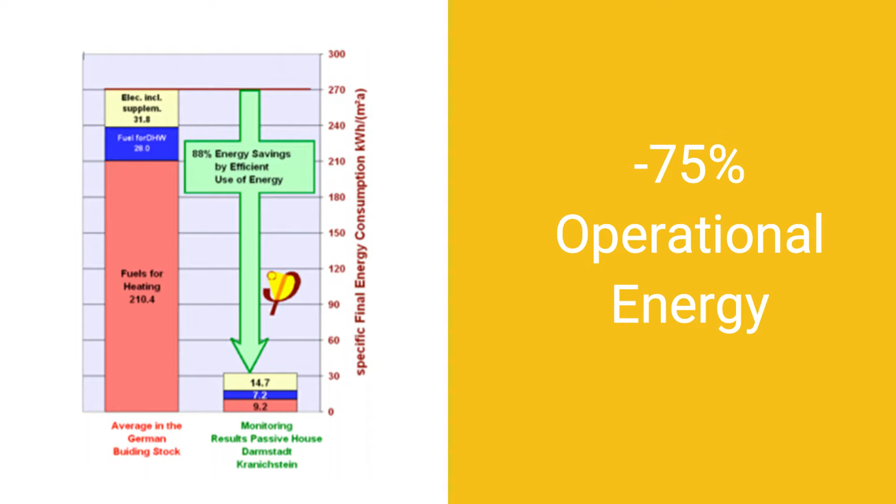The Passive House standard was created in the early 90s based on scientific research that concluded comfort drives performance. In the process of dramatically improving comfort, application of the Passive House principles also resulted in up to 90% reduction in the energy required for heating and cooling, and up to 75% reduction in the total operational energy use of buildings.

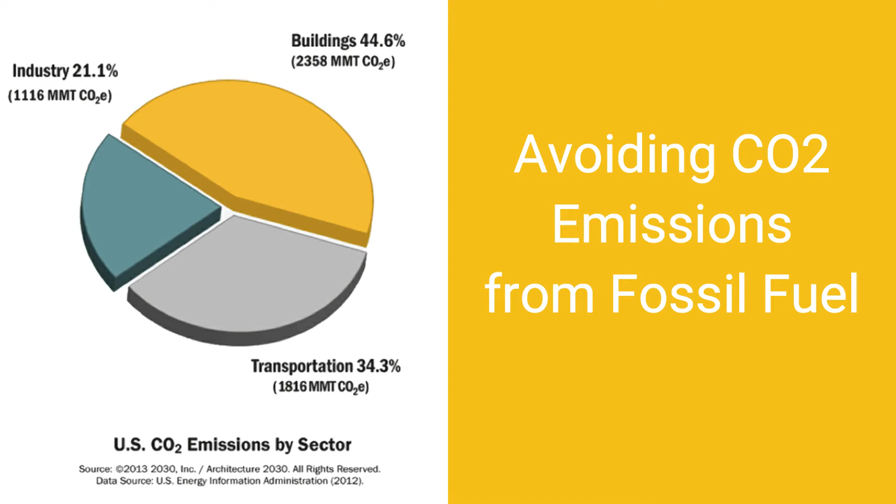Historically, almost all of that energy was derived from the burning of fossil fuels and has been a major contributor to CO2 emissions. In an effort to drive down those emissions, an increasing number of countries, regions, and cities are adopting the Passive House construction standard in order to support their transition to a fossil fuel-free energy grid and reach carbon neutrality. Those places include the province of Brussels, British Columbia in Canada, the entire country of Luxembourg, the cities of New York, Dublin, and many others.

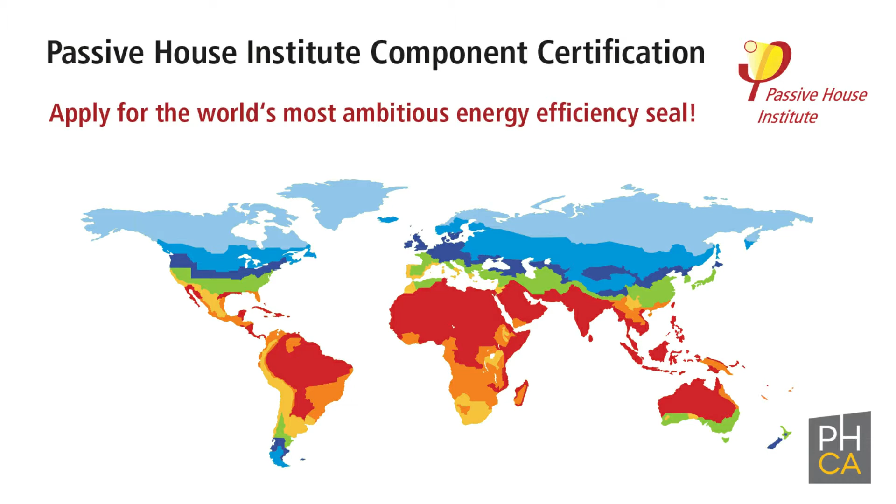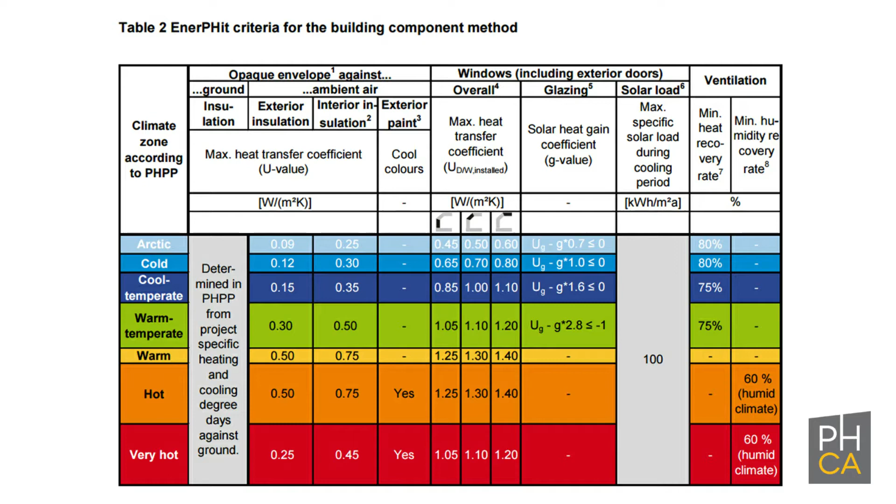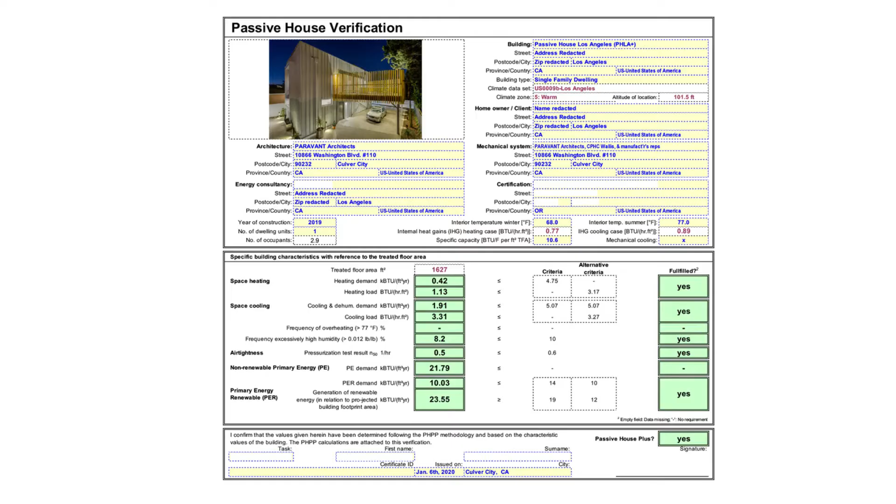It is important to point out that Passive House is climate specific, since even if the standard is setting worldwide energy targets for heating, cooling, and total energy consumption, the ways to achieve those targets differ dramatically based on the local climate. A simple but comprehensive energy modeling tool, called the Passive House Planning Package, or PHPP, allows design teams to identify and select appropriate solutions for their project based on location, building design, and performance goals.

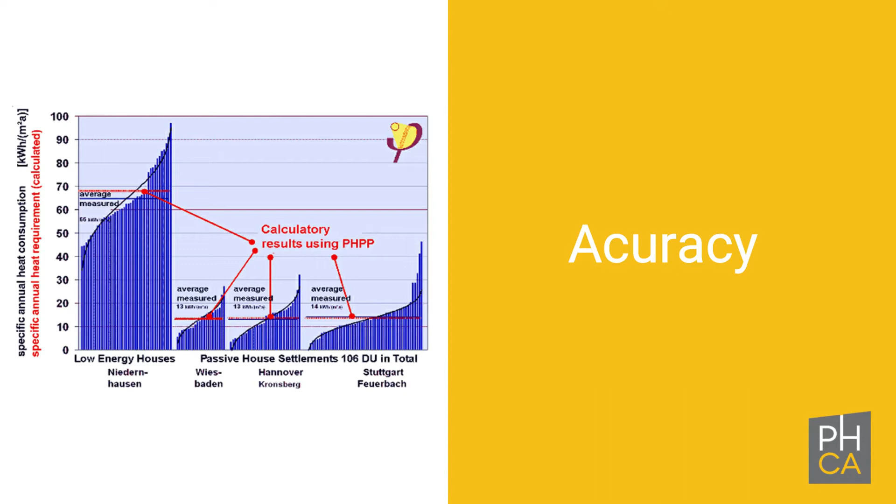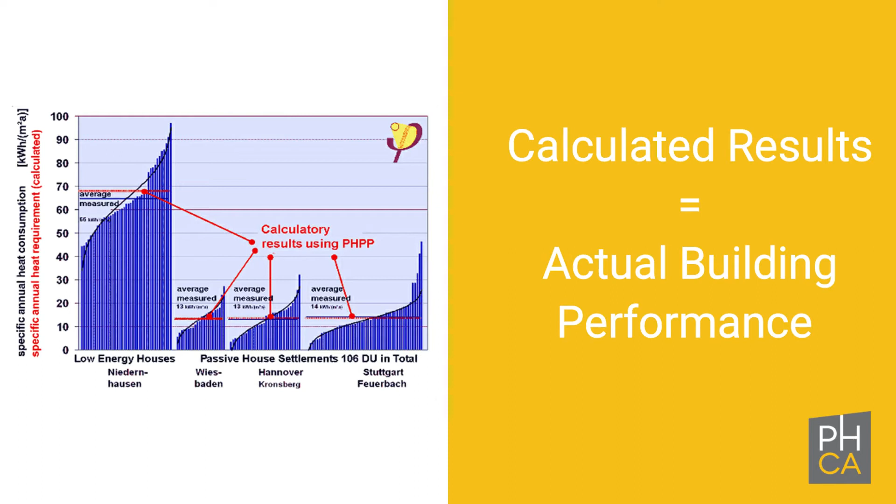Another important reason why jurisdictions are embracing Passive House around the world is the proven accuracy and the high correlation between the expected performance and the actual performance once the Passive House buildings are completed. The PHPP delivers reliable performance with no performance gap.

The 5 basic and inseparable key principles of Passive House are an airtight building envelope, strategic insulation correctly applied, analysis and management of thermal bridges, high-performing windows and doors, and continuous balanced ventilation.

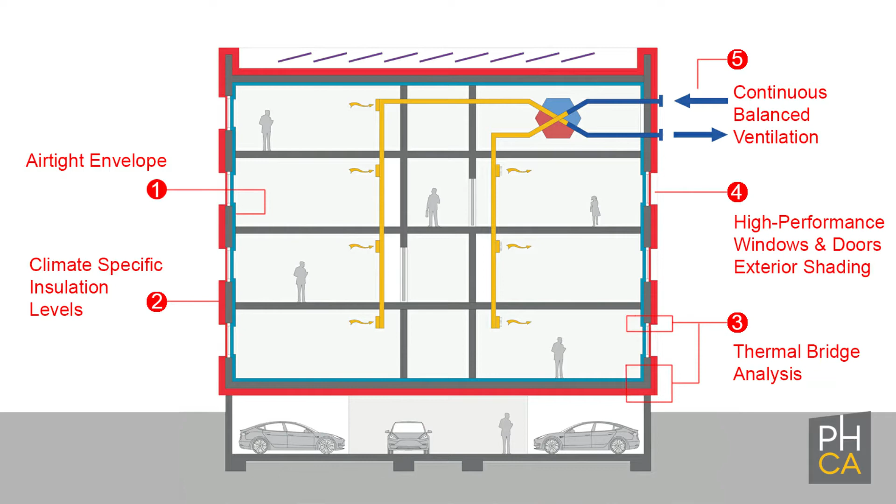What does all this mean for us here in California with our mostly mild climates? California was the first state to implement minimum energy requirements in 1974, and California's construction code remains today one of the most advanced codes in the country.

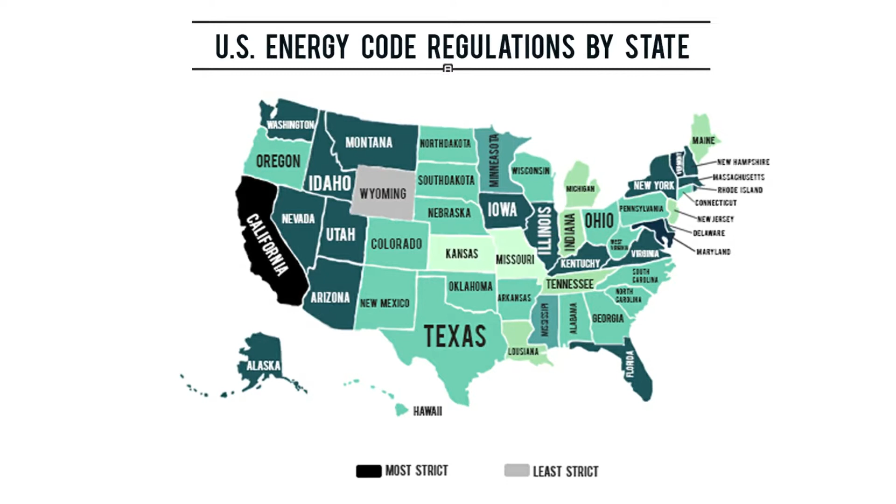Unfortunately, due to several ambiguities and loopholes, our construction code is not built to identify a defined end performance goal or move fast enough to avoid compromising our future and the future of the planet. Building codes are intended to set a bare minimum level of safety and performance. They work to prevent catastrophic failure at the bottom, not to define optimized outcomes.

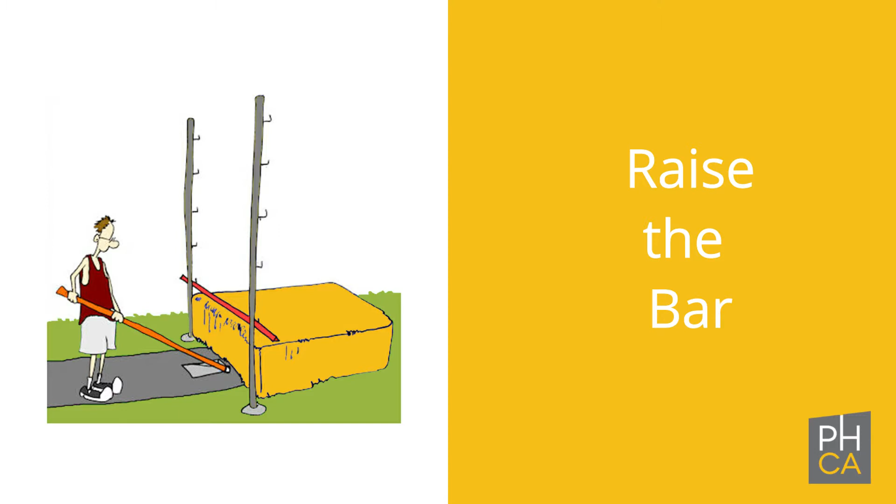The PHCA community already knows it's possible to build much more comfortable, healthier, and better performing buildings with little to no impact on the investment required, especially here in California.

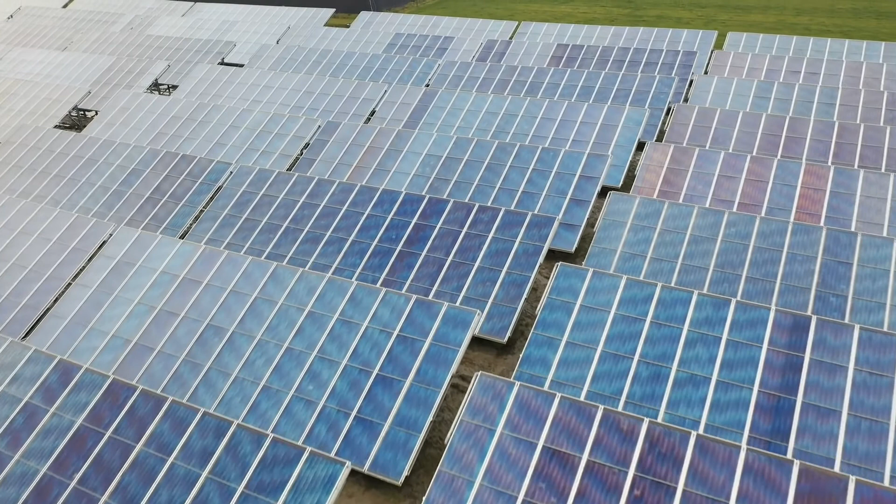A positive factor in California is our transition initiated away from natural gas to all electric. This decarbonization shift aligns perfectly with Passive House because the first step in decarbonization is to maximize efficiency. The Passive House Standard's Primary Energy Renewable (PER) framework goes one step further to optimize building designs to support a 100% renewable energy grid.

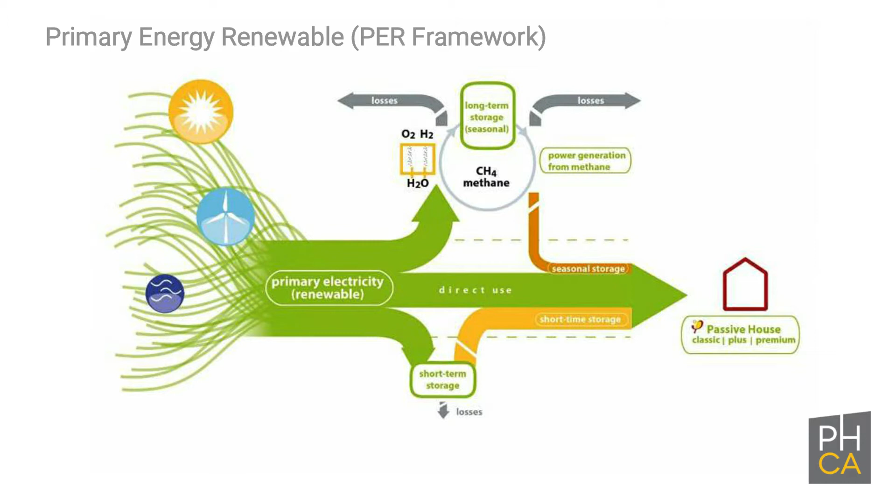Let's review the 5 key principles of Passive House and look at how they work together to provide a unified, integrated systems approach to the designing of buildings. The first 4 of the principles have to do with the building envelope, that is, the boundary between the inside and the outside. Passive House Principle Number 1, Airtight Building Envelope.

The most dramatic difference between a Passive House building and a standard Title 24 code construction is the airtightness of the building envelope. Because California does not require air tightness testing, the most significant loss of heat in winter or cooling in summer takes place through small gaps in your floors, walls, and roof.

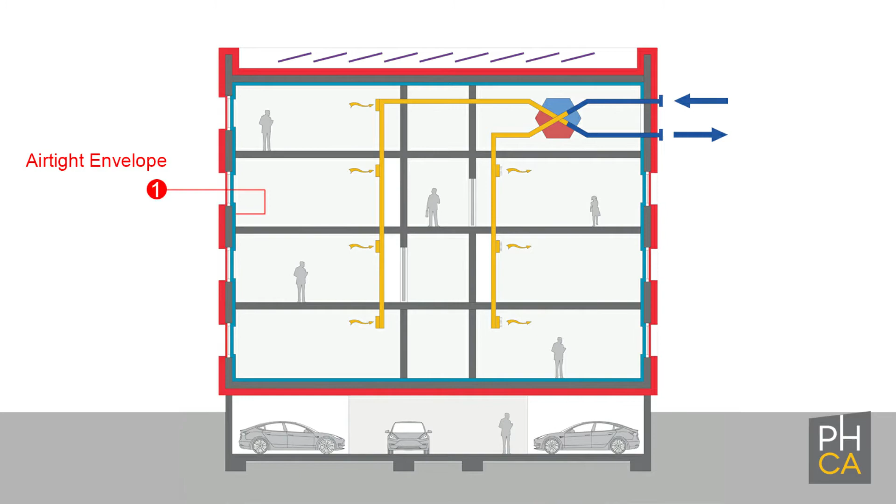By applying the Passive House air tightness requirement, a 20% improvement in energy saving would be made in local construction. To illustrate the potential gains, for a 2,000 square foot, 2-story house, the equivalent hole from the blower door test result is about a 5-inch diameter. Today, most of California's new construction of the same size have the equivalent of a 16-inch diameter hole. How do you expect to keep a place cool or warm and comfortable with a window open 24/7?

Passive House Principle Number 2. Strategic insulation correctly installed. Strategic insulation means a systematic plan for insulation throughout a building that is correctly installed.

In the mountains of California, we have cold winters and we experience some very hot days during summer in the valleys. But throughout most of the state, we enjoy a relatively temperate climate.

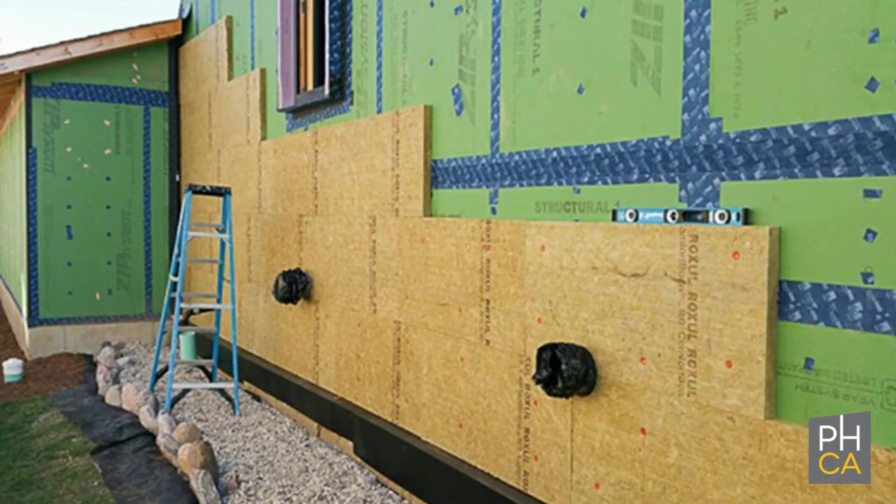Using the PHPP enables us to specify appropriate insulation for under the floor, within the walls, in the attic and/or roof, and often also a slim layer of 1-inch or 2-inch, not 16-inch in California like it can be in Minnesota, of continuous insulation on the exterior of the walls. This system of strategic insulation is a critical factor in achieving the drastic reduction in energy required for heating and cooling for a passive house building.

Passive House Principle Number 3. Avoid or minimize thermal bridging.

A thermal bridge is simply a break in the insulation, like for example a beam going from inside to outside a building, or the connections between the floors and the walls. That break in the insulation allows the heat to escape the building during the winter or to get into the building during summer. While intuitively this may seem insignificant, the amount of energy losses can be substantial.

These thermal bridges drastically increase the risk of creating condensation and mold and potential damages to the building structure. Therefore, they need to be avoided or minimized as much as possible.

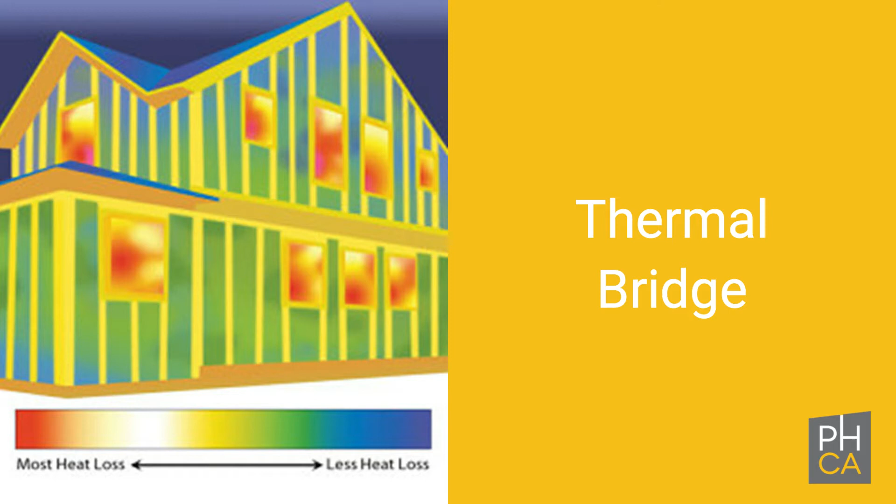Studs, beams, or concrete slabs that create breaks in the continuous insulation are the most common thermal bridges. It is important to avoid them whenever possible, using specific design details and thermal break products and materials. Paying attention to design details and installing a layer of continuous insulation on the exterior walls are the most common practices to avoid thermal bridges.

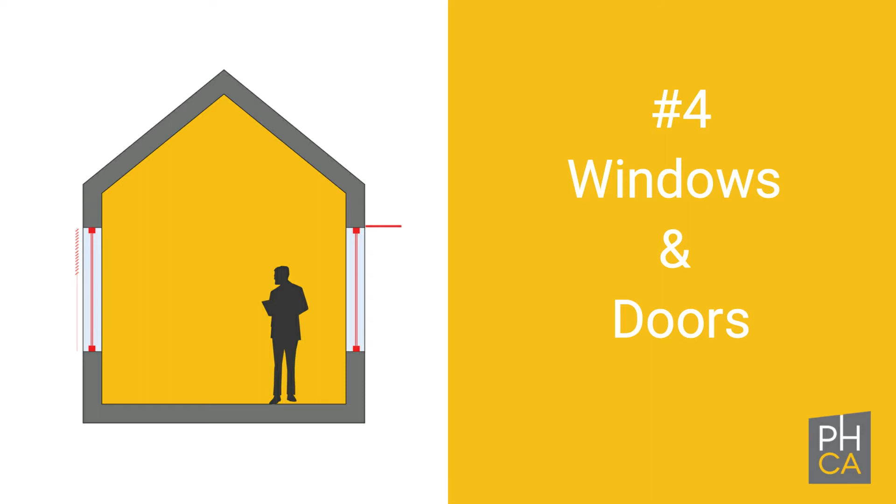Passive House Principle Number 4. High-performing windows and doors. Windows and doors are the weakest points of the building envelope, and it is important that they too are high-performing.

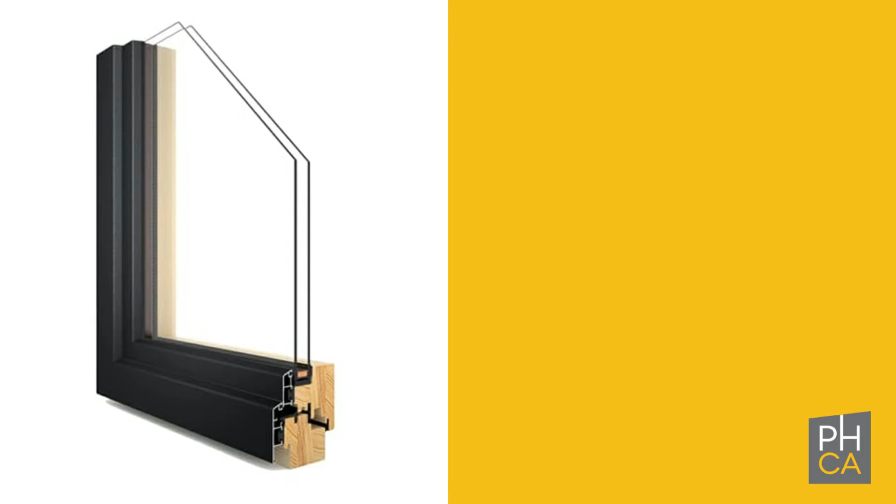While triple-pane windows are required in many locations to meet the Passive House energy targets, in most California locations, double-pane windows will work perfectly. But energy-efficient ones, which means we need better thermally insulated frames, high-efficiency glass, and ensure these are airtight.

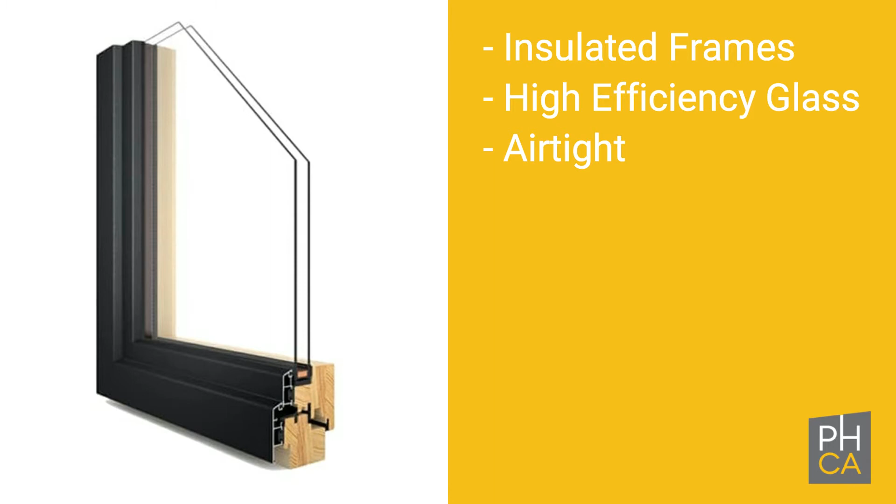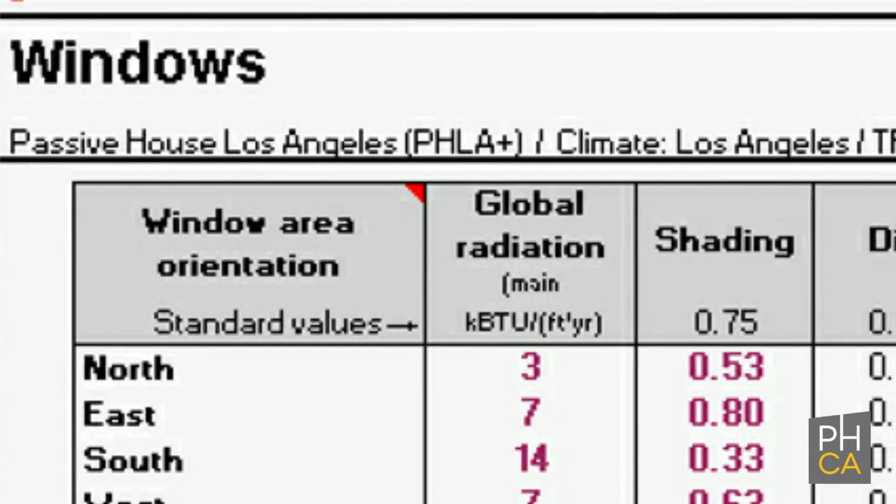A house, or any building, is a system, and the windows and doors are parts of that system. The detailed modeling of PHPP enables the specification of windows and doors appropriate for the overall performance goals associated with Passive House, including how they are installed.

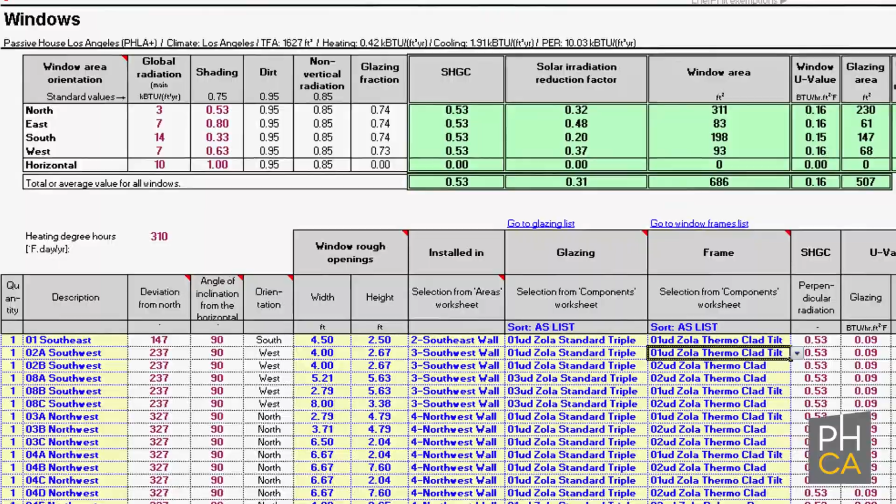Windows can also help to heat your place in the winter, but they also can make your place overheat in the summer. Therefore, placing and choosing your windows is crucial, and shading is also a key aspect of the design strategy. Shading by trees, fixed architectural elements, external blinds, but always external shading.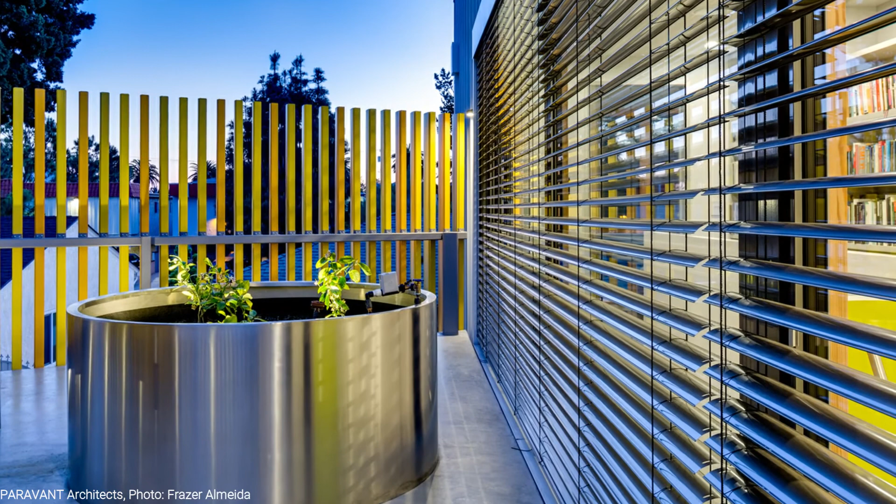Internal shading is far from being as effective. The heat is already in the building. It is too late. Now you can sit by the windows during the winter or summer without being uncomfortable. We've just made your place bigger without increasing the square feet.

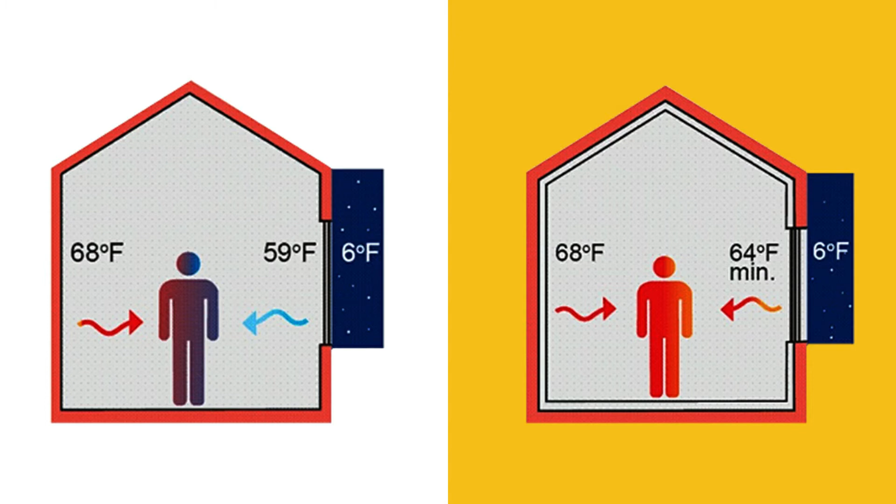Passive House Principle Number 5. Continuous ventilation, generally with heat recovery.

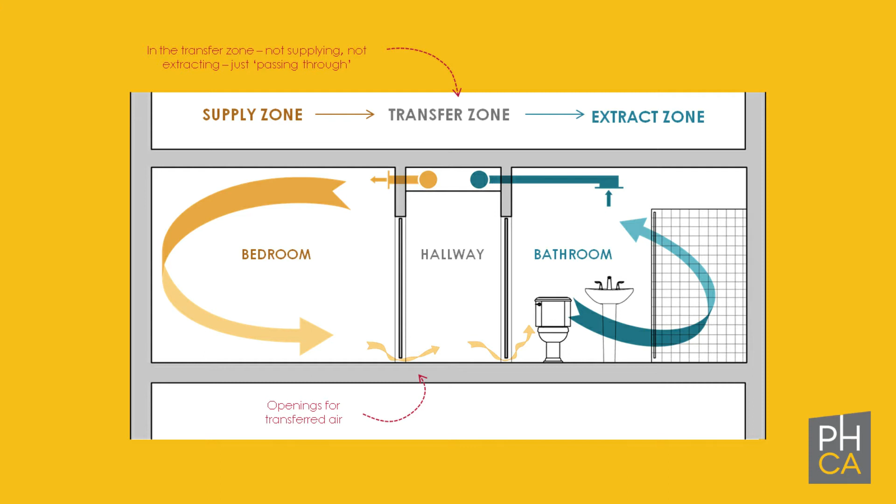Houses don't need to breathe, but the occupants do. In order to provide continuous filtered fresh air, a passive house requires balanced mechanical ventilation. A steady flow of fresh and filtered air is supplied to the living spaces 24/7, and at the same time an equal flow of air is extracted from the home, generally from kitchens, bathrooms, and the laundry room.

This continuous exchange of stale air for filtered fresh air is critical in pandemic times and reoccurrence of smoke from wildfires in California. Healthy indoor air quality is another important benefit of passive house standards.

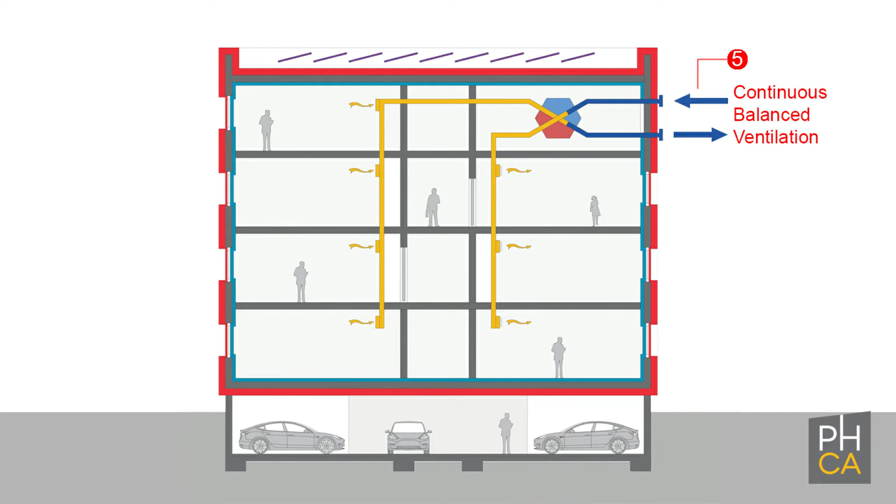This balanced exchange of air is accomplished most of the time with a heat recovery ventilator, HRV, that transfers the heat from the outbound conditioned air and transfers up to 90% of that heat to the incoming air.

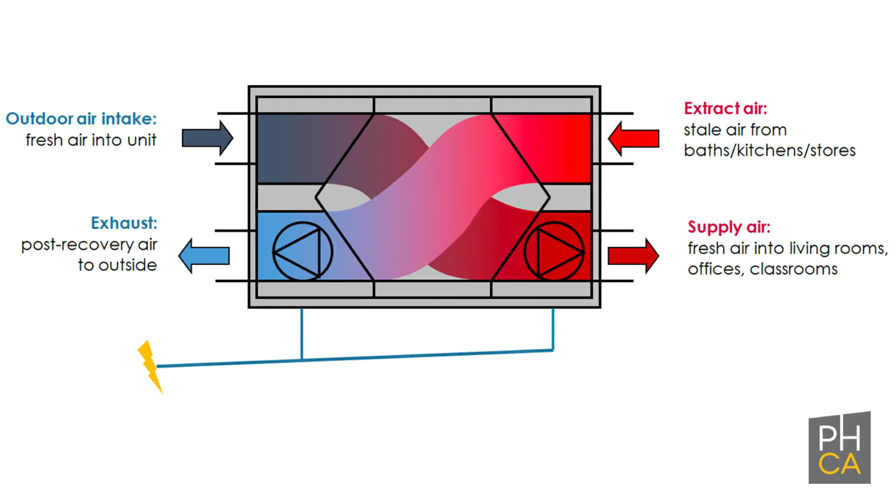In summer, the HRV works the opposite way. The fresh air coming in will be cooled down by the exhaust air going out. Also important, the HRV accomplishes the transfer of heat without mixing the outbound and incoming air.

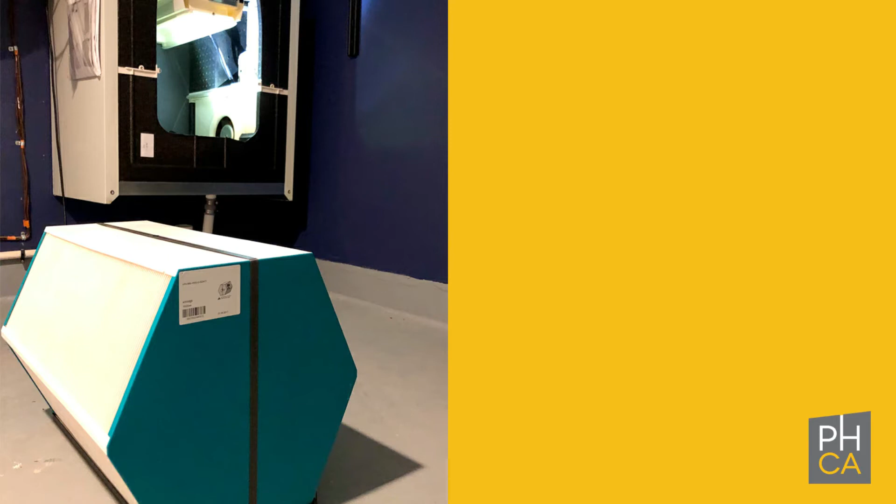As you can see, passive house is not rocket science. It is mostly just changing priorities based on common sense.

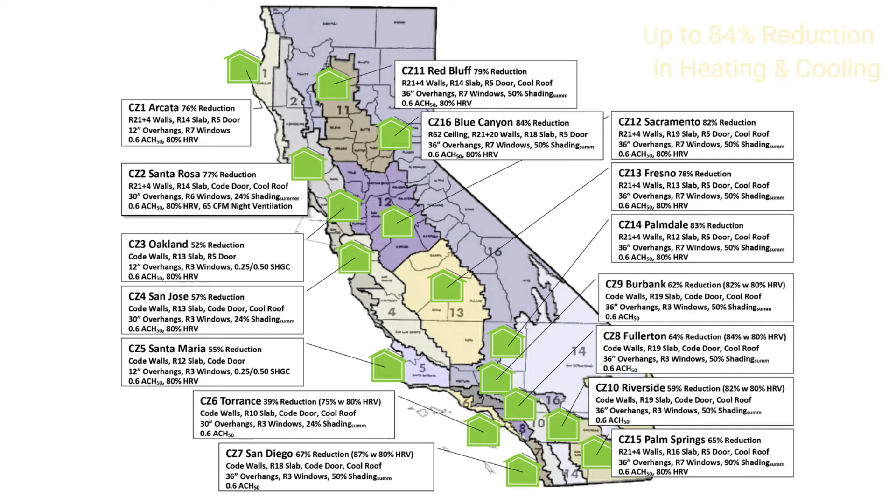Passive House California has been advocating for the passive house standard since 2007. A 2016 study demonstrated the gains for a single-family passive house compared to standard construction. Depending on the California climate zone, the heating and cooling energy savings would range from 40% to more than 80%. That is huge savings.

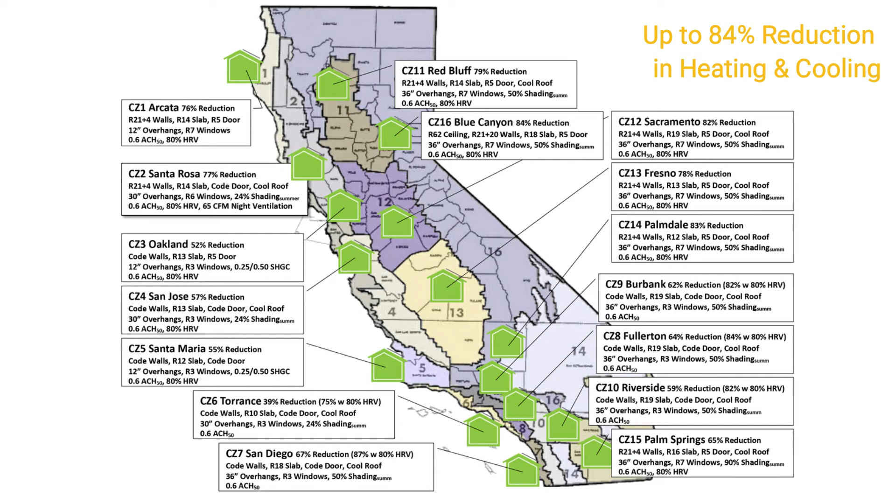A 2019 study based on a California Energy Commission multifamily prototype and validated by the California Energy Codes and Standards team went further, demonstrating the benefit of the Passive House standard over the Title 24 code. At the Net Zero Conference 2018, an icebox challenge between a Passive House box and a Title 24 box dramatically illustrated the superior performance of Passive House.

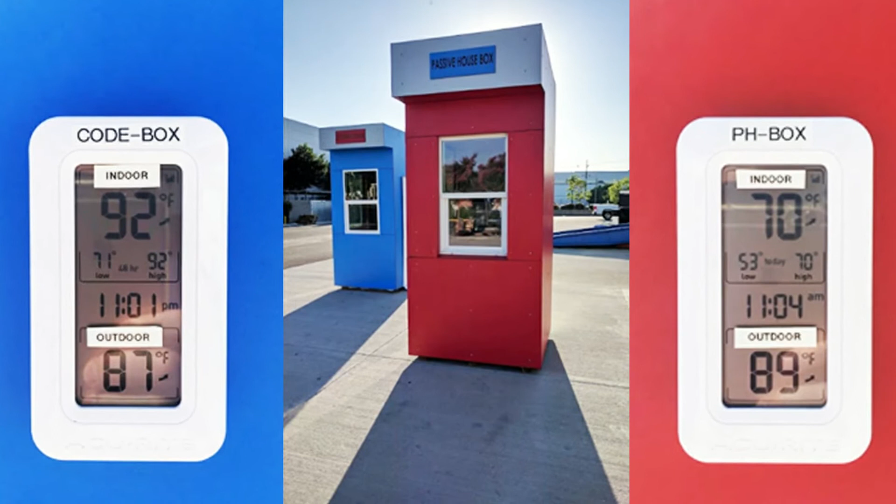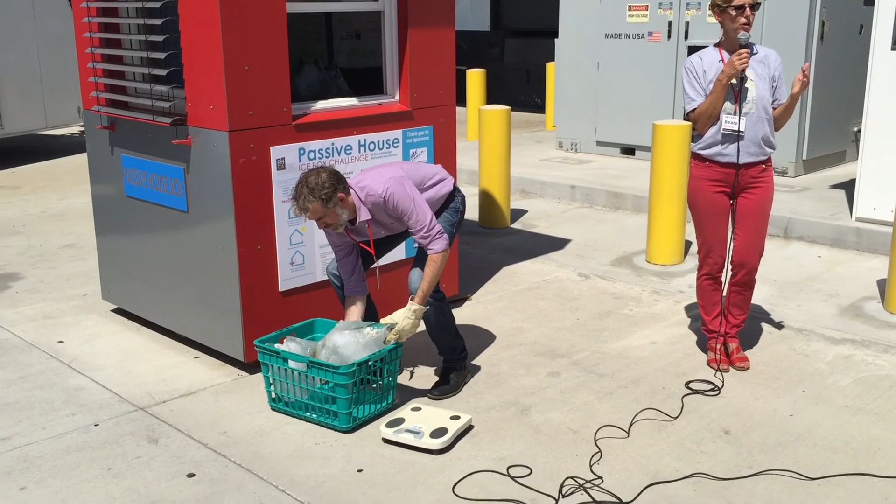In each box, we put 500 pounds of ice. At the end of the challenge, after 7 hot days, 61 pounds of ice was left in the Passive House box. In the Title 24 box, all the ice was gone more than 24 hours before the end of the contest, and the interior of the code box was much hotter inside than outside.

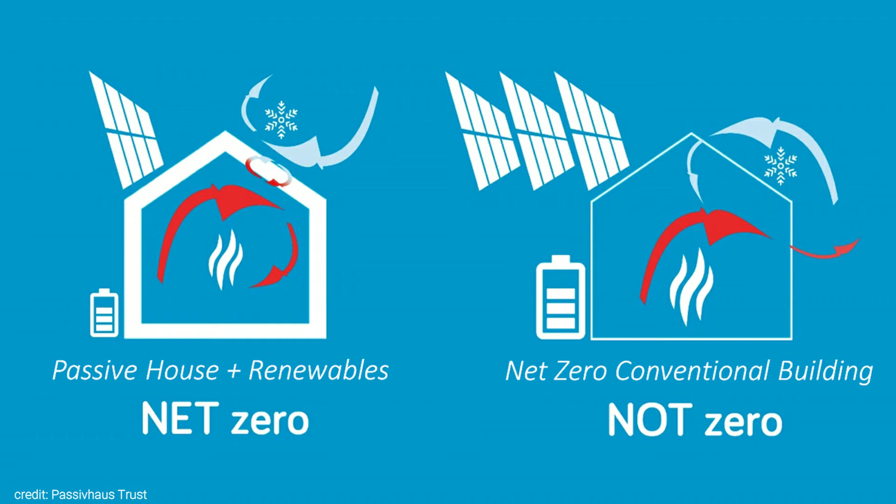The reduction in operational energy related to the implementation of the Passive House standard enables net zero energy with as little as half the solar panels and doubles the impact of battery storage. California's PV requirements for residential construction can be achieved with a significantly lower investment. This is the smart way to get net zero energy.

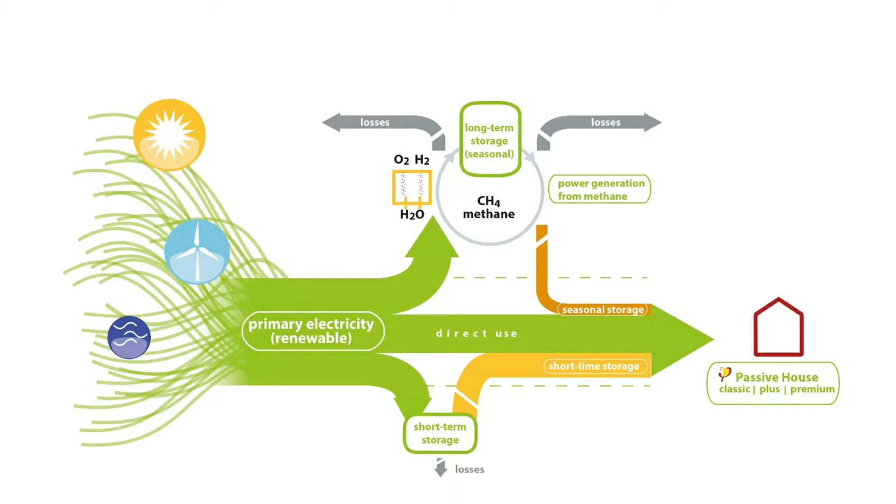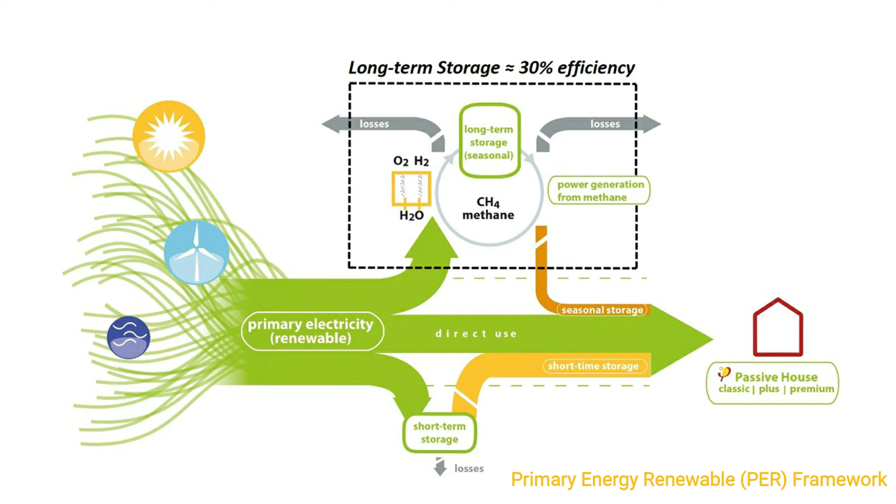California was the first state that committed to all renewable energy by 2045, but renewable energy from solar and wind are variable based on time of day, weather, and time of year. Therefore, we will need a massive amount of energy storage to provide sufficient power overnight and across the seasons. Because of seasonal storage losses, it is necessary to produce 2 to 3 times more energy than required for building operation. So every kilowatt hour saved by the efficiency of a Passive House reduces demand from production or storage in the same proportions.

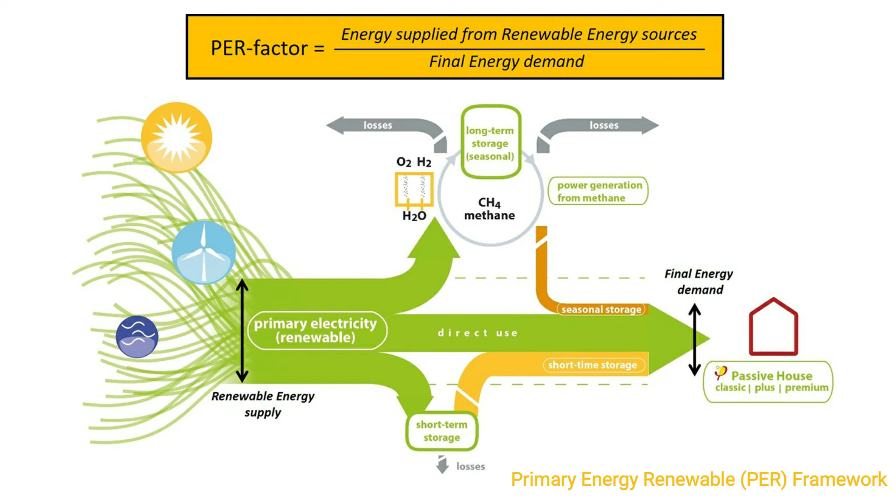Reducing our energy consumption is a key aspect of the successful transition to renewable energy, and the efficiency of Passive House buildings is part of the solution - a substantial contribution indeed. The Passive House Standard has 3 certification classes.

Passive House Classic is the original and was developed based on comfort and efficiency. An airtight and well-insulated envelope was the foundation. Orientation and shading to manage solar heat gain further enhanced both comfort and efficiency, and balanced ventilation with heat recovery provided continuous fresh air with little heat loss.

In 2015, Passive House Classic was joined by Passive House Plus and Passive House Premium in order to integrate solar PV into the Passive House standard. Passive House Plus requires enough solar PV to reach net zero energy, and Passive House Premium requires significantly more solar PV and can approach net zero carbon.

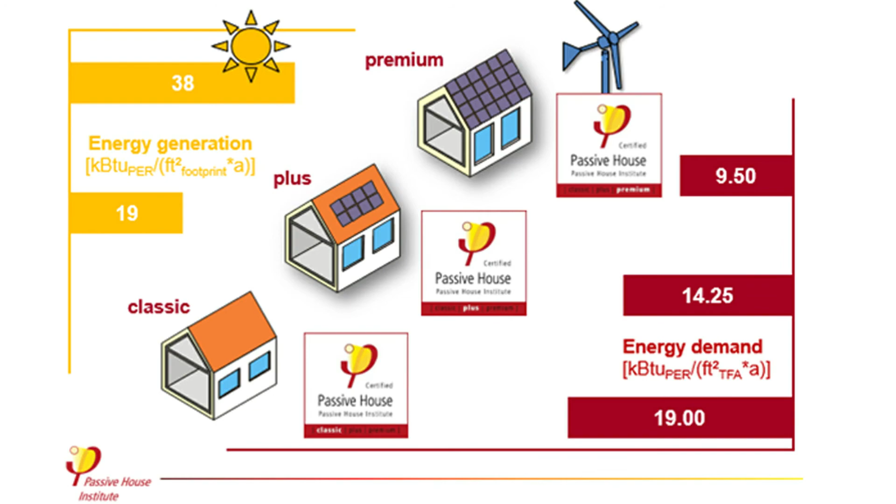In 2012, because existing buildings are a huge part of the energy consumption we need to reduce, the Passive House Institute launched EnerPHit, a standard and subsequent certification for the optimal application of Passive House protocols to the retrofitting of existing buildings. The EnerPHit standard provides a comprehensive approach to achieving the highest levels of both comfort and efficiency at an appropriate level of investment and will play an important role in the mitigation of climate change.

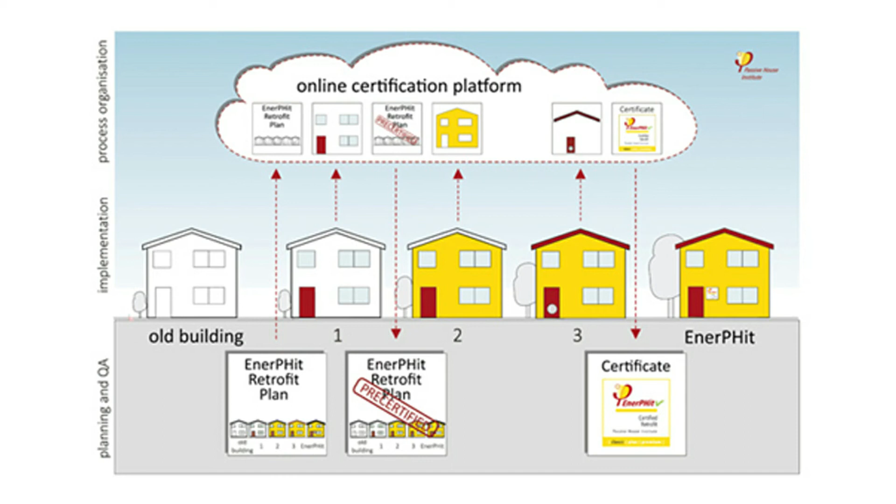The Passive House Standard is a globally applicable reference tool for energy consumption and comfort, addressing the main part of the building's CO2 emissions during its life cycle.

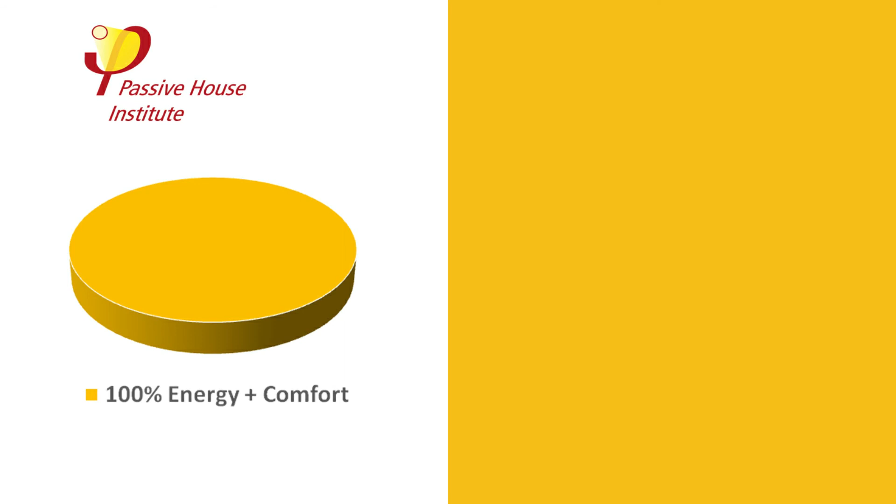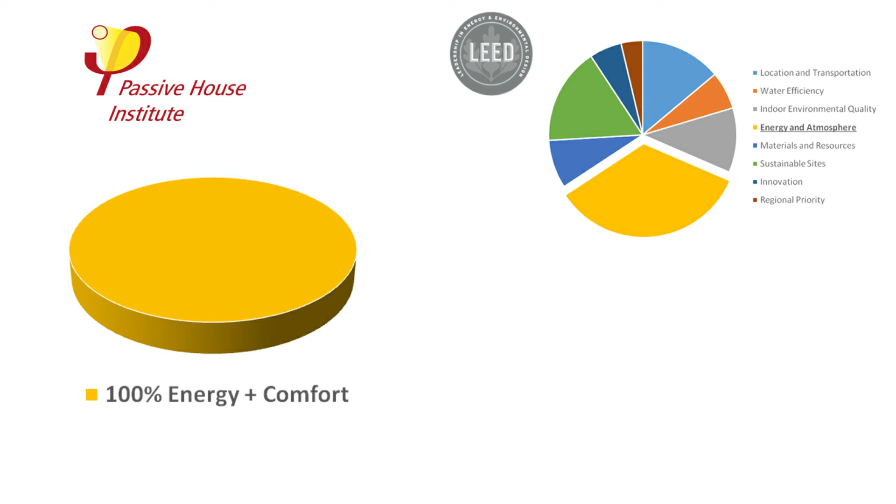Passive House for energy efficiency and comfort of buildings is foundational and works in synergy with environmentally and socially responsible building rating systems. This is why building certifications such as LEED from the USGBC or the Living Building Challenge from ILFI encourage the use of the Passive House Standard for the energy part of their programs.

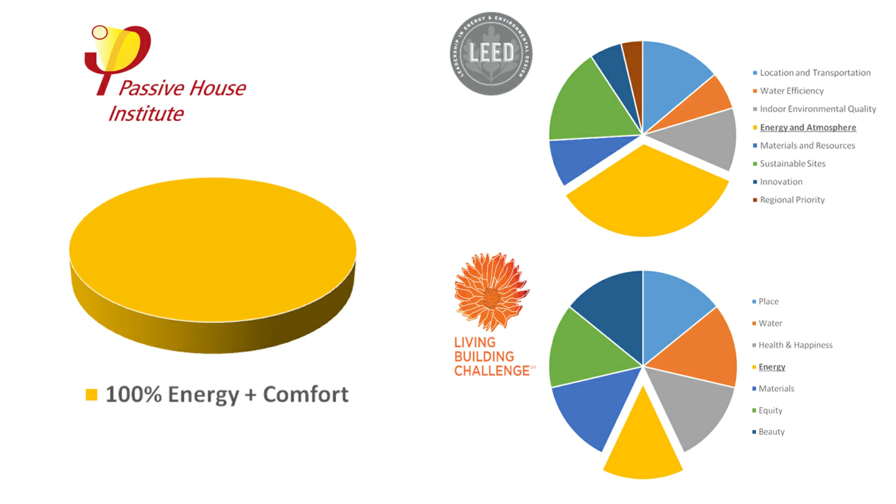Among those major additional issues, the Passive House Institute strongly supports reducing the CO2 emissions related to the construction of buildings, especially by avoiding foam-based insulations and favoring biosourced construction materials.

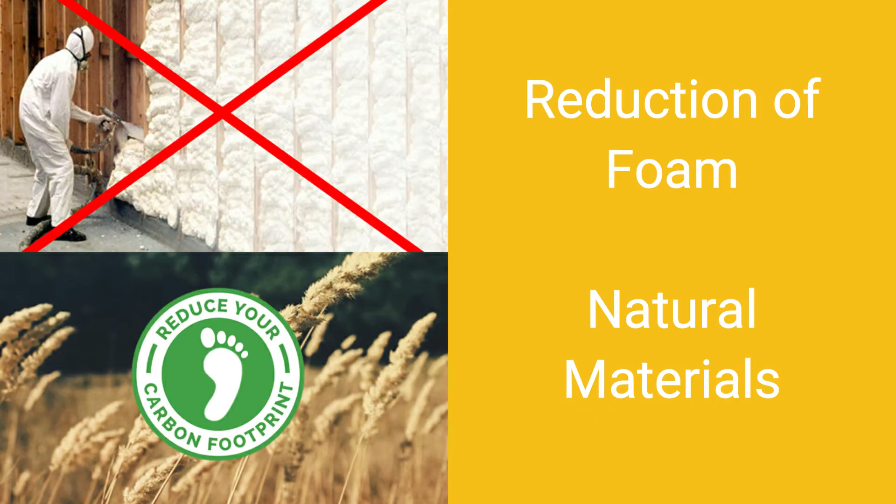Many steps need to be made towards a carbon-neutral future to mitigate climate change. According to the most recent IPCC report, we need to reduce our CO2 emissions by more than 50% by 2030. Adopting the Passive House Standard for new construction and the EnerPHit Standard for major renovations are important steps in that direction.

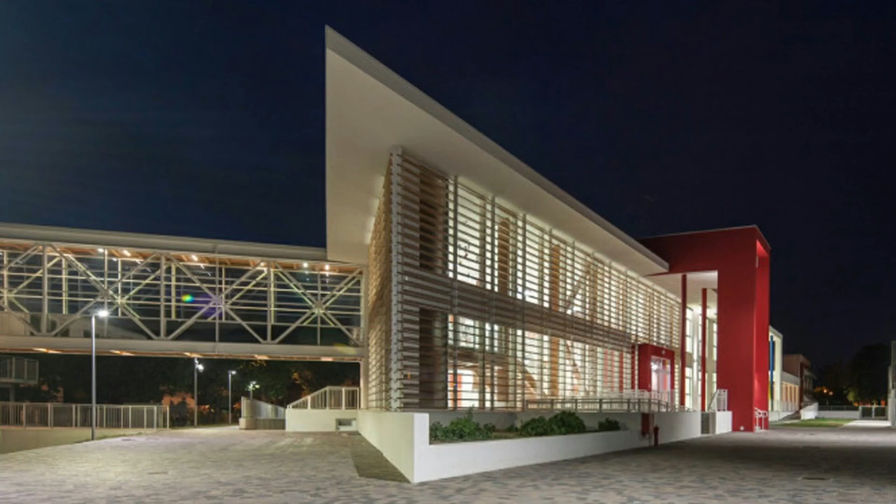The Passive House Standard is applicable to any and every building, whether single-family houses, multifamily apartments, high-rise buildings, hotels, schools, office buildings, supermarkets, fire stations, museums, hospitals, swimming pools. Designing and building or renovating to Passive House standards is a positive step for the occupants, owners, communities, and planet.

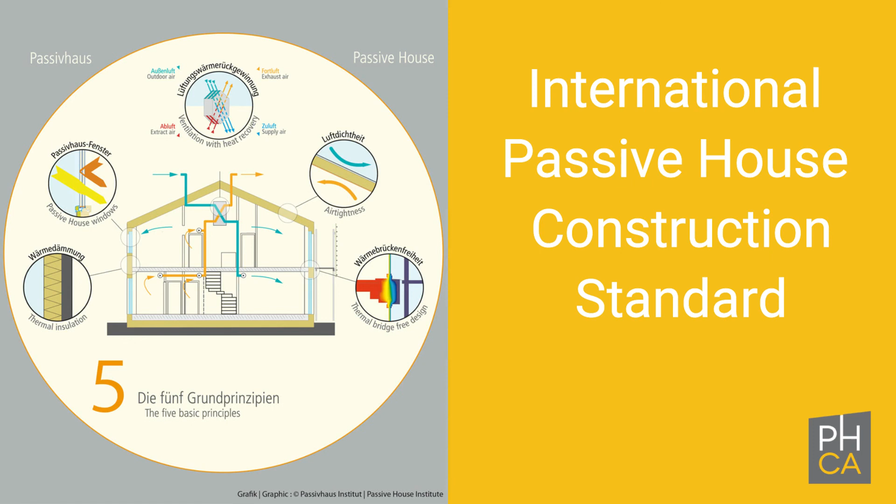Many of these buildings can be visited in California and around the world during the Passive House Open Days. More information about Passive Houses near you on our website.